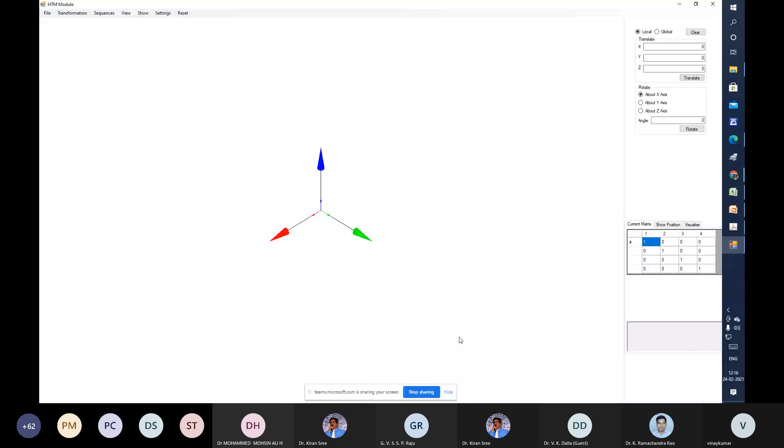in the screen, two coordinate systems are displayed and both are coinciding with each other. Okay, the bigger one and the smaller one. And what are the axes? This red color denotes the x-axis, this green Y and blue Z axis. Okay, and if you click the file, you can open new or you can access some file, okay, and this is the transformation and sequences, okay, also you can sequence your motions.

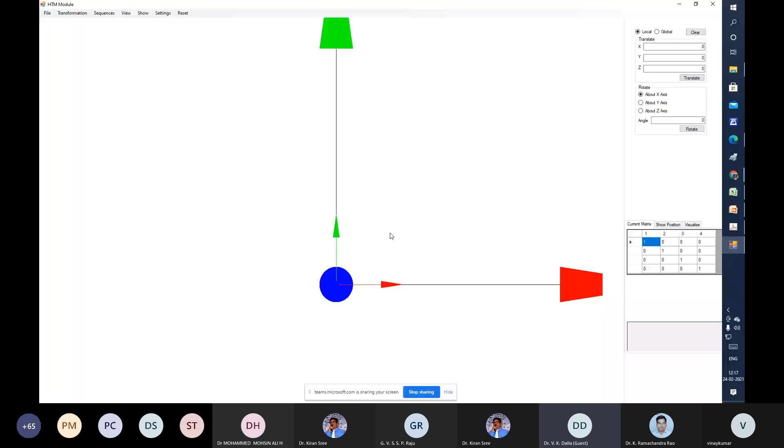What about this, oh sorry, the visualization, so obviously it is the isometric view, okay. Also we can visualize the coordinate systems in XY, like this one, okay, XY or XZ or YZ. In this way we can visualize, okay. And I'm going to click the isometric view. By default it displays this, okay.

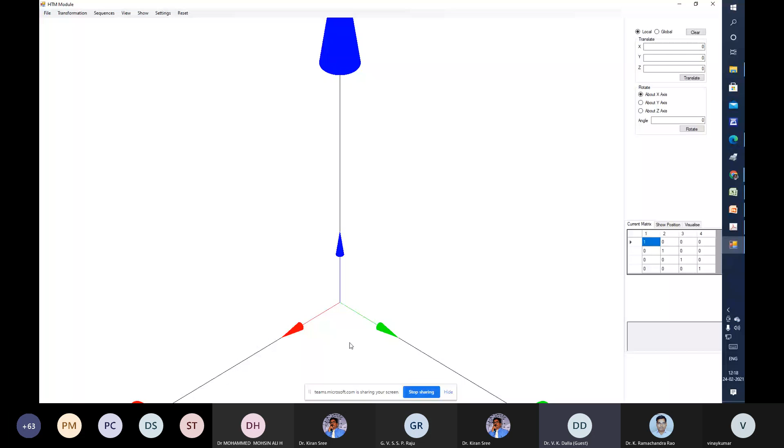Now the right side, if you see the local and global, okay. Local means, if you see the smaller one, suppose it is the absolute frame, yeah, absolute coordinate system, which is also known as the fixed coordinate system, okay. And the bigger one, if we measure this bigger coordinate system with respect to the absolute frame, okay, then it will be known as the local coordinate system.

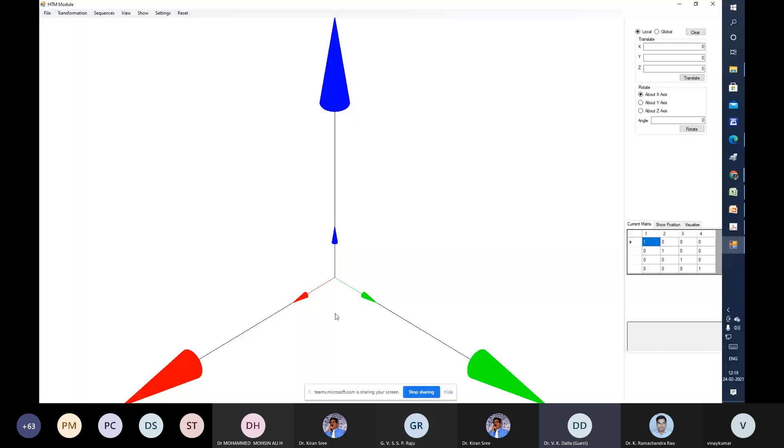Okay. And suppose somewhere in the workspace, if you see my cursor movement, okay, suppose any frame or coordinate system is here, which is the absolute coordinate system, and we are going to measure the coordinate system of the body, whether stationary or mobile. So if we measure with respect to that coordinate system, then it will be known as the global coordinate system. Okay. So here we are going to visualize motions. Okay. So in transformations we see the motion along the axis and motion about the axis.

So if there is translation along the axis, that will be known as pure translation. And if there is rotation about the axis without translation, it will be known as pure rotation transformation. If there is both translation plus rotation, it will be known as combined transformations.

So transformation means, suppose any moving object near us. What are the sequences for the motions? Suppose a robot got moved from one place to another, and that movement is only translation along the axis. And after that it got rotated, taking a turn by some angle. These are known as the transformations.

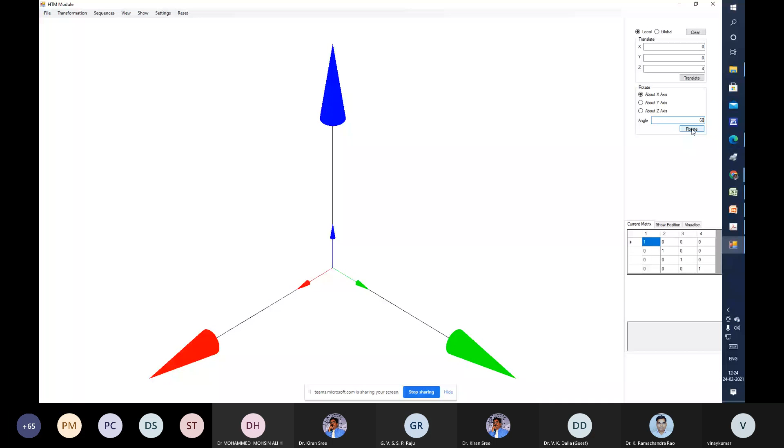So now I'm going to rotate about the x-axis, with an angle of 60 degrees. Now I'm going to rotate it. See. So what are the observations? If there is rotation about its own axis, there will be no movement in that axis, but the other axes, y and z, got rotated. Another observation is they are rotated by the same angle: y rotated by 60 degrees and the z axis rotated by 60 degrees.

And suppose we want this about y, and this about z. And suppose we want again about the x-axis; the red color denotes the x-axis. So you can observe the rotations. So these are the sequences of the operations.

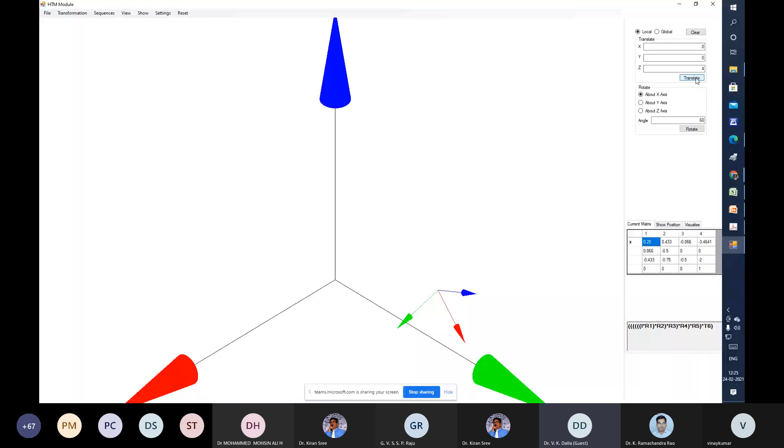Similarly, suppose we want to translate along the z-axis, and the y-axis. In this way we can visualize. And if you see the matrix below, the current matrix, show position, visualize. It denotes the name itself: HTM, homogeneous transformation matrix.

Matrix you all know, but to get the solution, meaning the exact position and orientation of the robot end effector, we need to multiply the matrices of each transformation. Getting my point? Each transformation will give one matrix, so for all transformations we need to multiply the matrices. Then we can know the exact location of the end effector.

Whenever we talk about a robot, we are talking about the robot end effector. And what is the robot end effector? By name you can know: cause and effect. What are the causes? Due to input torques or forces, the robot manipulator will move, and ultimately its effect can be visualized at the end of the robot. That's why the name is end effector.

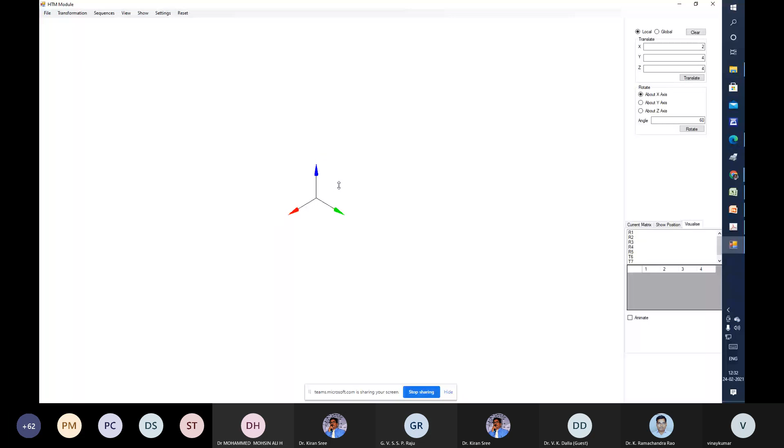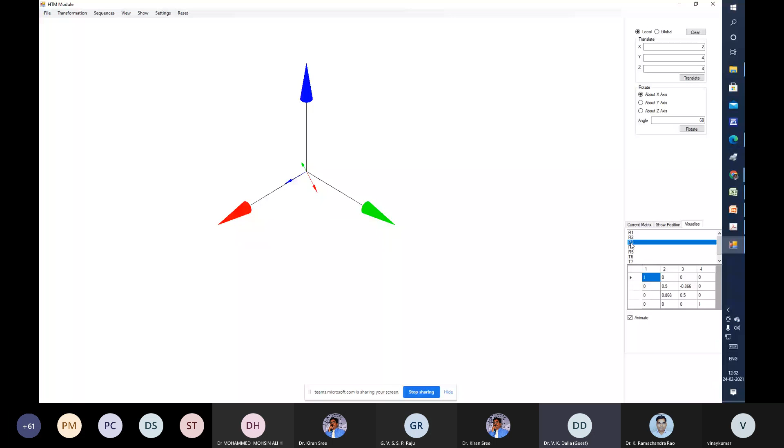See, these are the sequences of the transformations, and in the animation we can see what is happening, like 2, 3, what we did in the third step, and the fourth, 5, 6, 7, and the last one, where T denotes translation. So in this way we can visualize the coordinate systems.

And it is not only limited to robotics. For anything, whether in computer science or electronics, for any object whose location we are going to measure, we need to apply the coordinate system. It is not only limited to robotics.

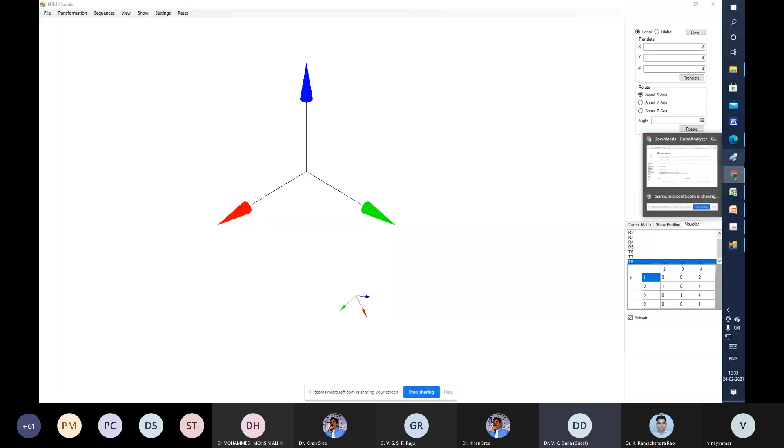Yeah, please let me know if you have any doubts or queries. If you're allowed in the chat box. Okay, I think not allowed. Yeah, no problem. Okay.

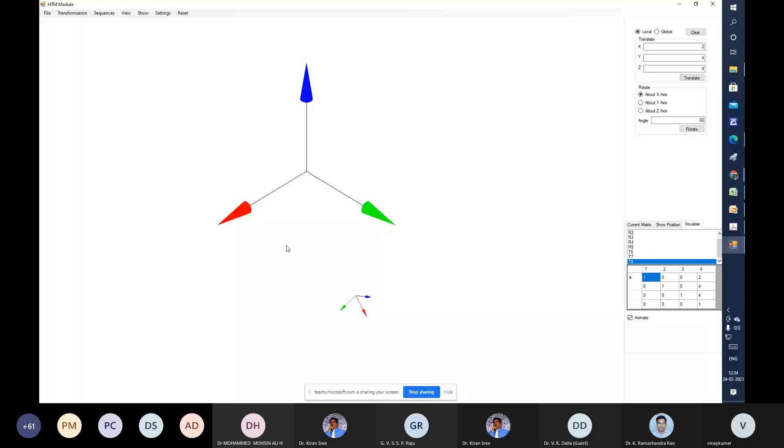So this was about the HTM module, the homogeneous transformation matrix module. Here we visualized the movement of the coordinate systems. We know about the transformations and the types of transformations: pure translation, pure rotation, and rotation plus translation. Also, we know about the local and the global coordinate systems.

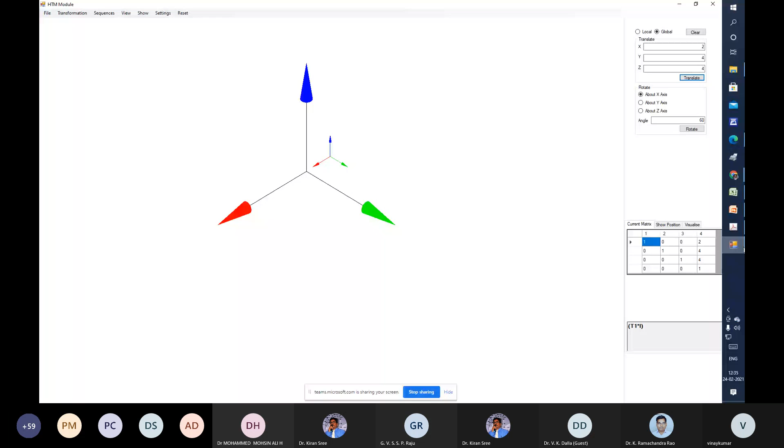Also, we know about the transformation matrix. The transformation matrix denotes both the robot end effector position and its orientation with respect to the base of the robot. Also, we visualized the sequence of the transformations. Now, I am going to open another software, the main software.

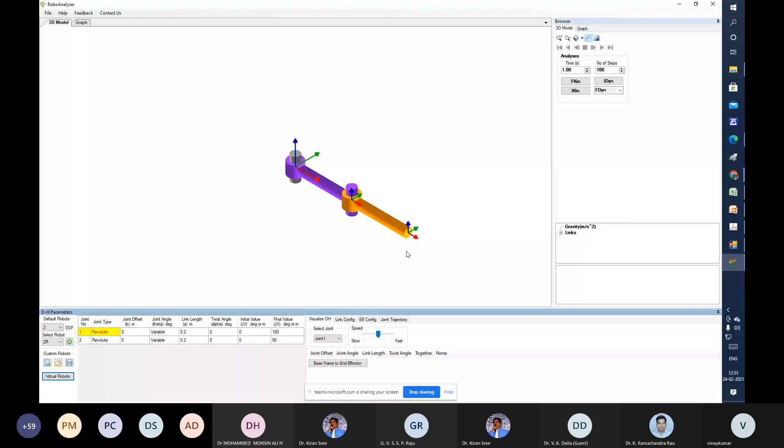So by default, this robot named 2 degree of freedom revolute joints is displaying. So see, this is the 3D model of the robot. Based on the cursor movement, we can zoom in and zoom out. So what about the coordinate systems? See, at all the joints, the coordinate systems are there.

Then only we can locate the end effector. Without fixing the coordinate system, we cannot locate the end effector. We cannot locate the robot. Right? Where is our robot? We cannot locate it. Now, see below the DH parameters. Whether you're from mechanical, CS, or electronics, it is a very general question. So what are these DH parameters? What is this DH convention and why is it required to study?

For a simple robot, you can easily locate the position and the orientation. Like this kind of robot I have shown here, anyone can locate. Suppose you want to know the robot end effector position. So what do you have to do? If this is L1, this will be L2. So what will it be? Now I'm going to open my PPT for this.

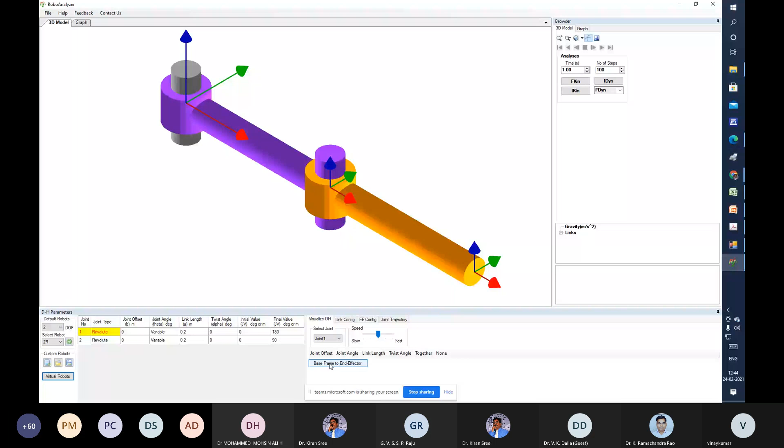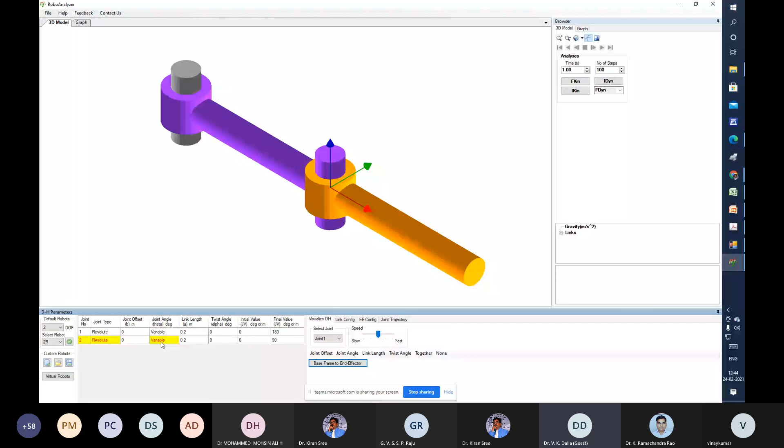And yeah, see the 3D model and simultaneously see the DH parameter table. Again, see, if I click this base frame to end effector, what is happening? Joint number 1, revolute joint, and now it is coming to joint number 2, and the joint offset is 0. Joint angle is variable here, and the link length 0.2. It got translated 0.2. Twist angle is 0.

Okay, now the initial value and the final value. The initial value is what? The position of the robot. The final value is what? The final position. Okay.

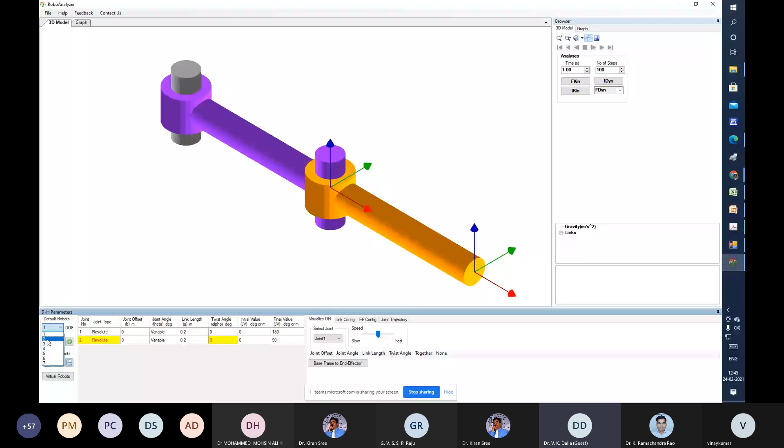So now here there are a number of default robots like 1 degree of freedom robot, 2 degree of freedom robot, 3, 4, 5, 6 degree of freedom robot. Also we can visualize. Okay, this is the 6 degrees of freedom robot. And 4 degrees of freedom robot. And this 2 degree of freedom robot with revolute joints we have visualized.

Okay, what about the prismatic joints? If you select 2P and click load selected robot, it will take updates. See what is happening here. It got updated and the joints are now prismatic joints. Base frame to end effector. Now I'm going to move the coordinate systems. And what's happening? You can see here.

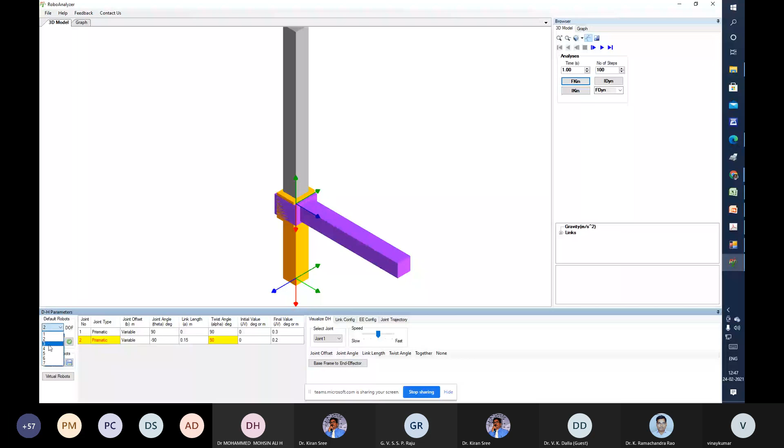Now, the forward kinematics we want. What is the forward kinematics? For better understanding, let's select some more robot and revolute joints.

This one. Now, there are four things: forward kinematics, inverse kinematics, forward dynamics, inverse dynamics. In the case of forward kinematics, what we want to know is the robot end effector location. In inverse kinematics, we just reverse it - now we want to know about the joint variables. So forward kinematics, once again, we want to know about the robot end effector positions.

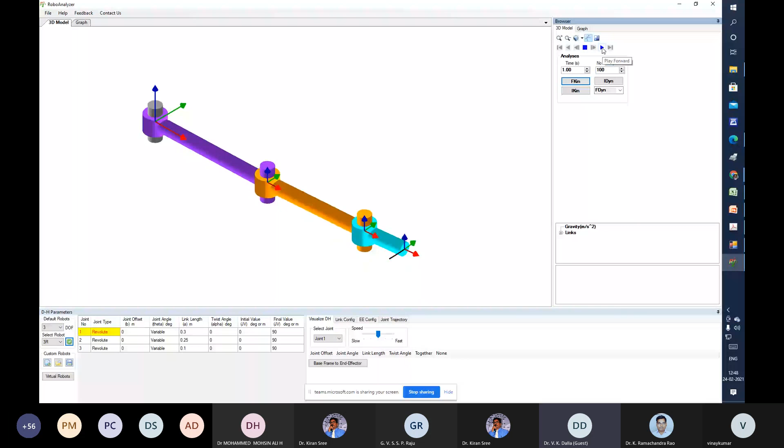Okay, now I'm going to play it. See what's happening. And this traced solid curve is known as the trajectory.

The trajectory is the time varying path equation, it depends upon time. If you read in some books, it clearly defines the difference between the path and the trajectory. The path is the time independent equation of the robot trajectory - it's a time independent equation. But the trajectory is the time varying equation.

Now, the forward kinematics - what we are going to know and what are the inputs. So joint angles, or joint variables, I'm not just saying joint angles because there may also be prismatic joints. So joint variables are the inputs, and what are the outputs? Outputs are here to know about X, Y, Z - these are the outputs.

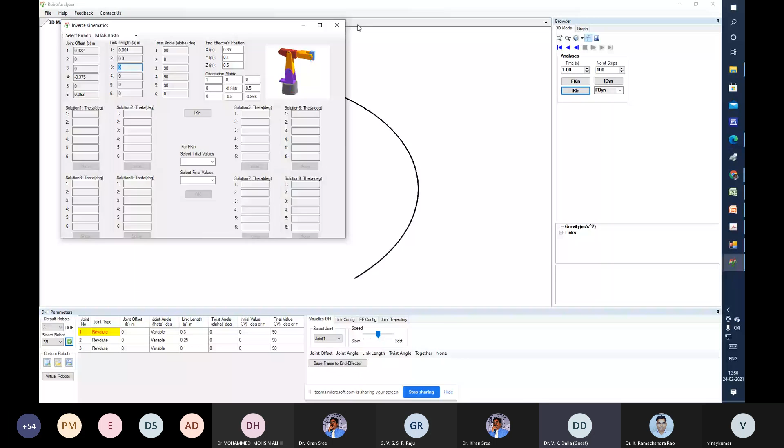Now, inverse kinematics. In inverse kinematics, the outputs will now be inputs. You can see here the end effector's position: X is equal to 0.35 meter, Y 0.1, Z 0.5. So these are fixed now.

And what are the variables, the joint variables that we want to know? For the given end effector's positions, what will be the state of joint angles?

So now I'm going to click the inverse kinematics. Now see the solutions - meaning, to reach the same goal point, what are the alternative options we have? Like so, and that is known as solution 1, solution 2, 3, 4, and so on. 8 solutions are displayed here.

There may be more solutions, but due to this software's constraint, it displays only 8 solutions. Meaning, there are multiple ways to reach the same goal point for the given inputs. And what are the inputs? The joint offsets, link length, twist angle - these are the inputs. And the number of solutions depends upon these inputs.

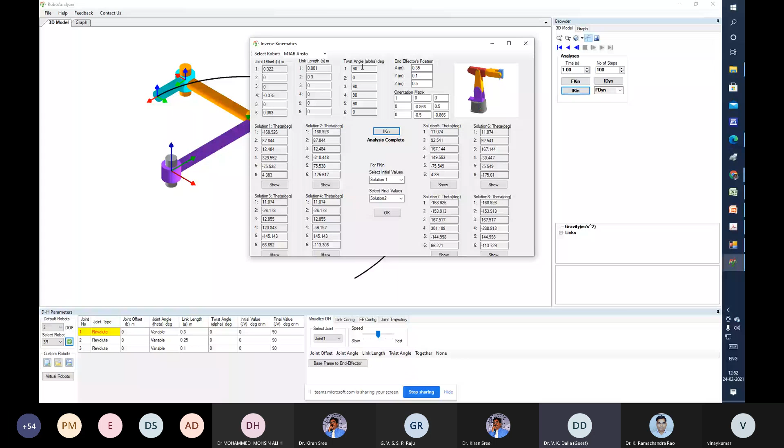So at this stage we know about forward kinematics, then inverse kinematics. Forward kinematics gives only one solution. Inverse kinematics gives multiple solutions, and sometimes a single solution, sometimes no solution. Suppose a robot is going to, say, pick a water bottle.

Suppose a robot is going to pick a water bottle, and that is beyond the reach of the workspace. Wonder what is the workspace? Workspace is the maximum reach of the manipulator.

Then do we have any solution? No, because the object is not inside the workspace. So in inverse kinematics, we get either single solutions, multiple solutions, or even no solutions.

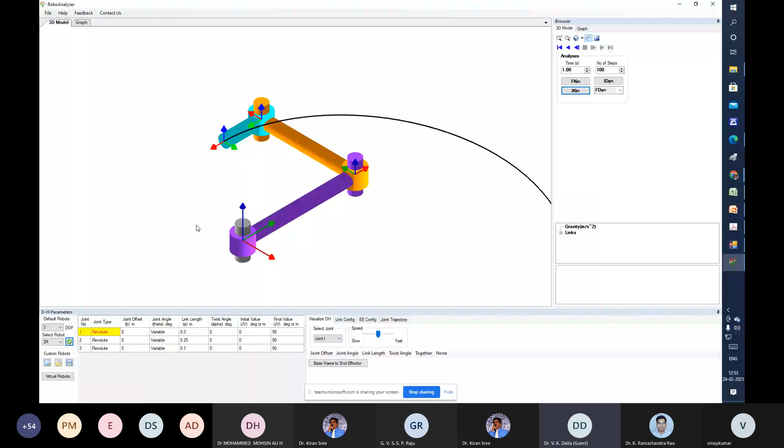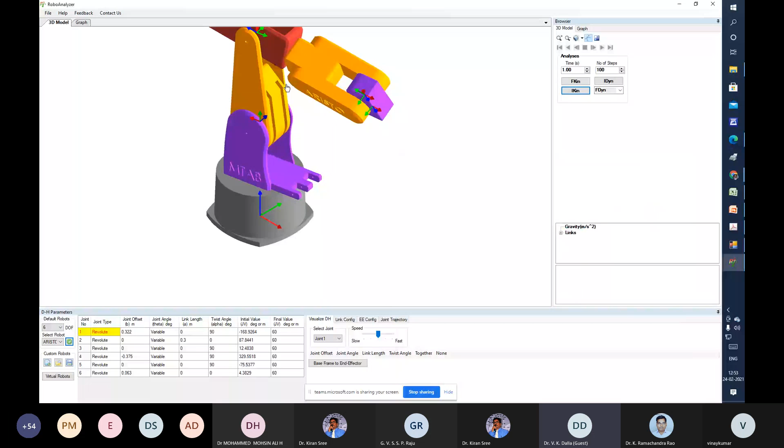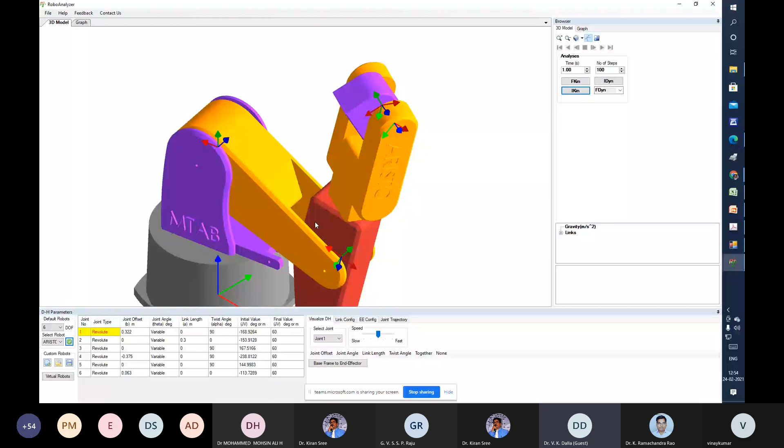Okay, so inverse kinematics, now if you observe, suppose I am going to click solution 1. What is happening? See, solution 1 I have clicked. Okay, so solution suppose 4, solution 5, 8. So what is happening? The robot configurations are being changed, but the end effector positions are at the same point.

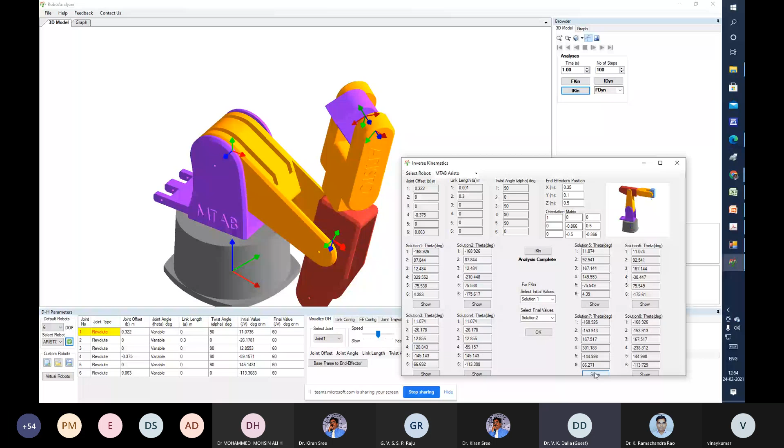You can further visualize - I am going to click solution 1, solution 2, solution 3, solution 4, solution 7, and so on.

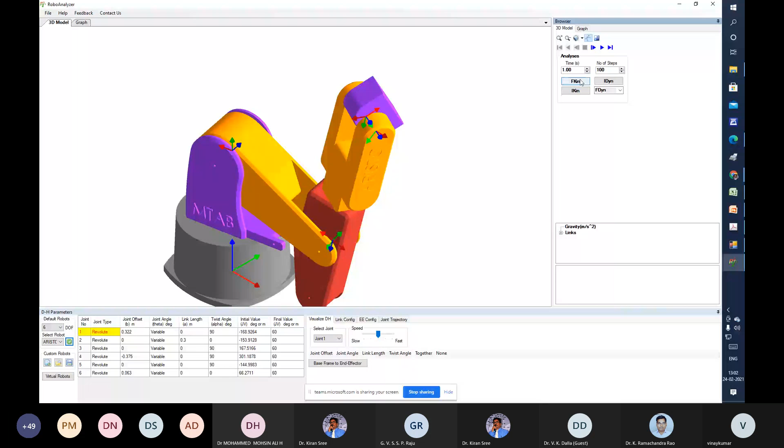See the motion, and I'm going to click graph. Data doesn't exist. What about the other things? In this way, we can get the robot end effector positions.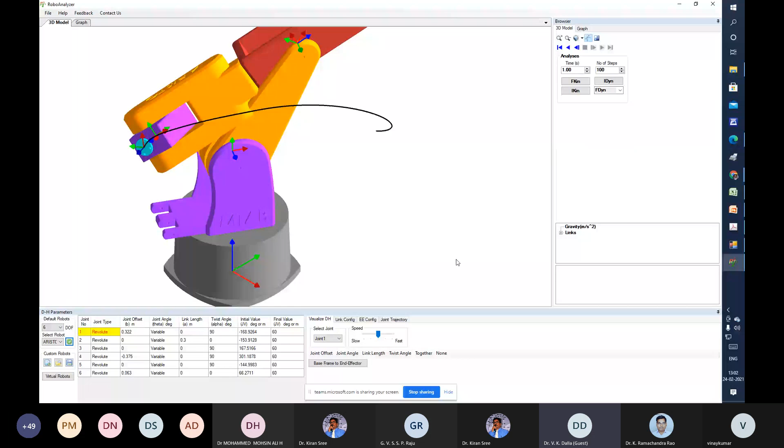Now, suppose we want this for this kind of robot. So this I am doing. Oh, what is happening?

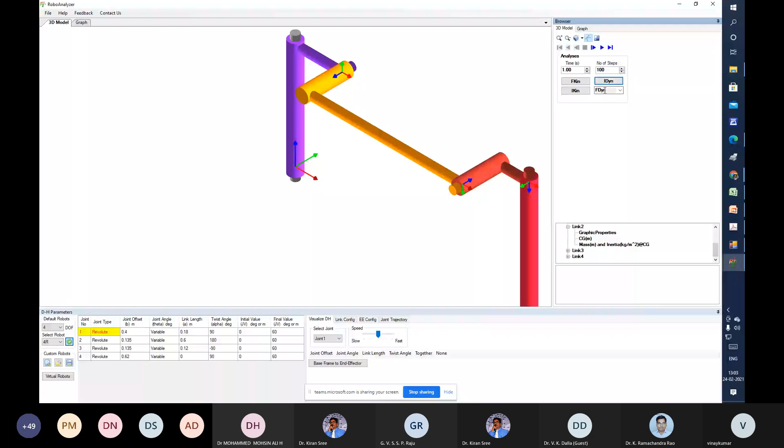No dynamics now. In this way we can visualize the forces and torques with the help of graphs. The robot motion we're seeing will be the same whether we include the dynamic portions or not. In this way we can visualize the kinematics and dynamics of a robot. Now I'm coming to the PPT part.

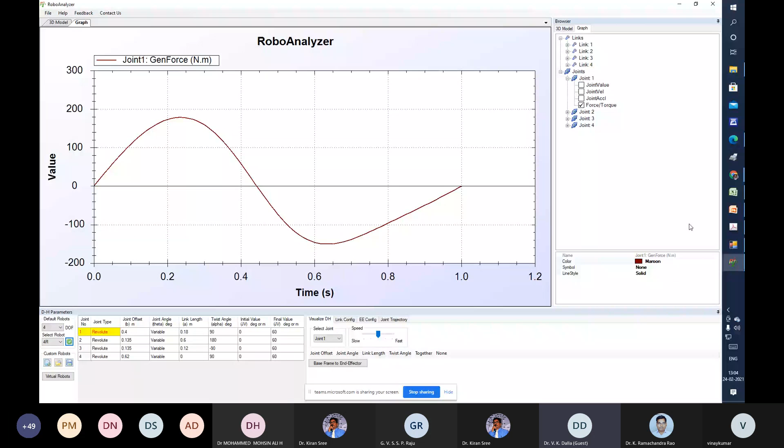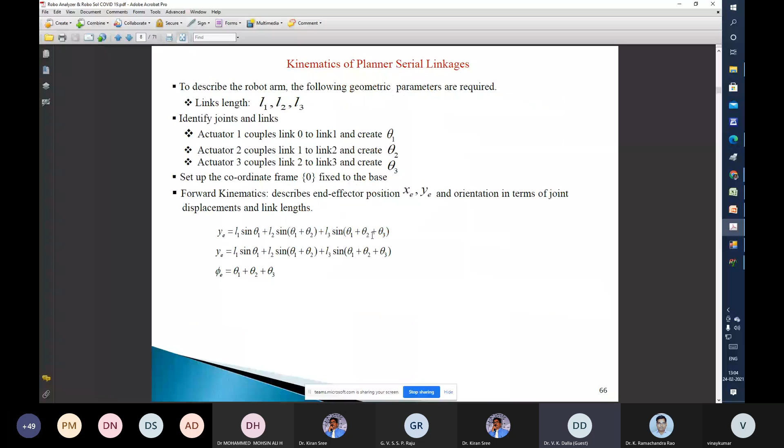So there were some assumptions, kinematic chains, then forward kinematics and inverse kinematics. This we came to know about, and how to know the positions and orientation of this kind of simple robot. And inverse kinematics - what are the problems with inverse kinematics?

Sometimes the problem is we don't get any solution. But what are the plus things? We get multiple solutions. These are some assumptions, and the multiple solutions again - to reach the same goal point there are two configurations: elbow up and elbow down. So in this way we can reach the same goal point by two ways.

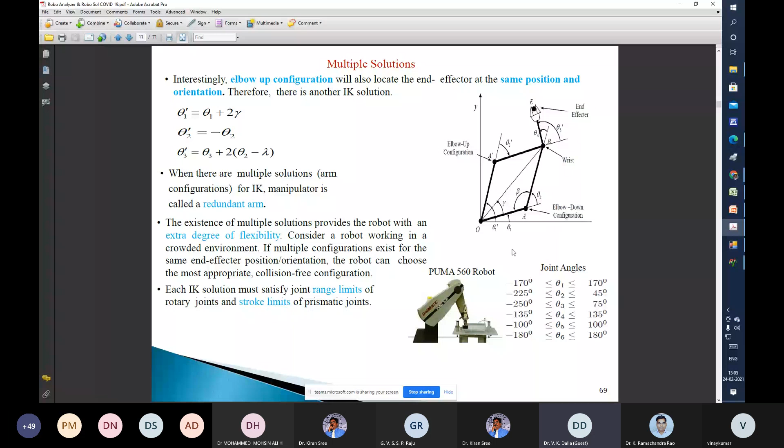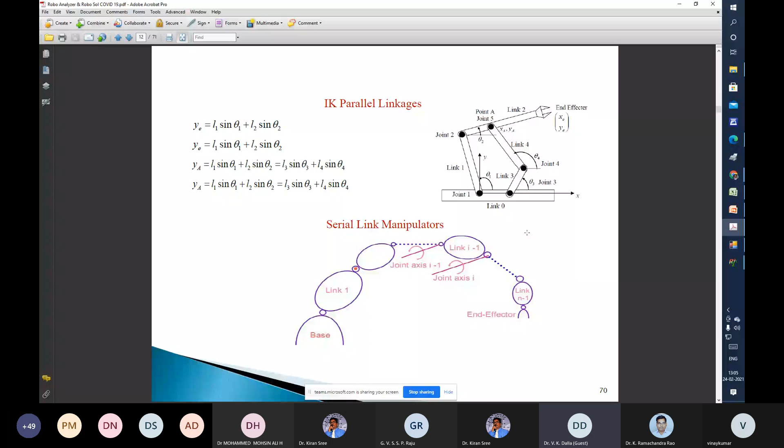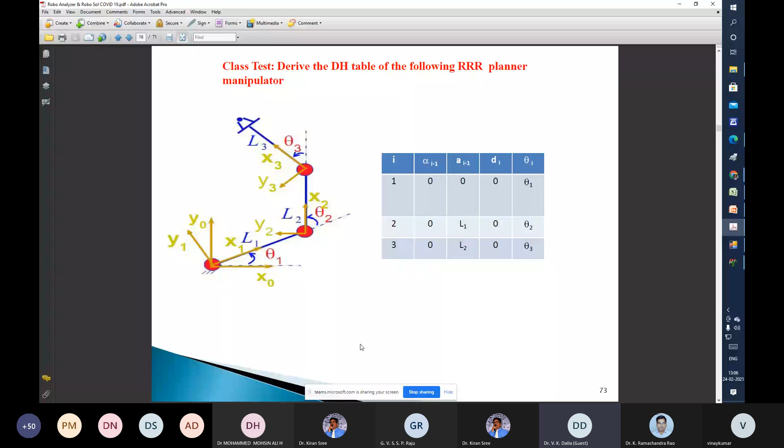Same here, using these parallel linkages also we can understand. Regarding DH conventions - these are the DH convention, DH parameters, and with the help of DH convention how we can get to know about the parameters. For the simple robot also we can go with DH parameters, but that's not advisable - for the simple robot you opt only for geometric analysis, simply we can get it. So regarding this RoboAnalyzer...

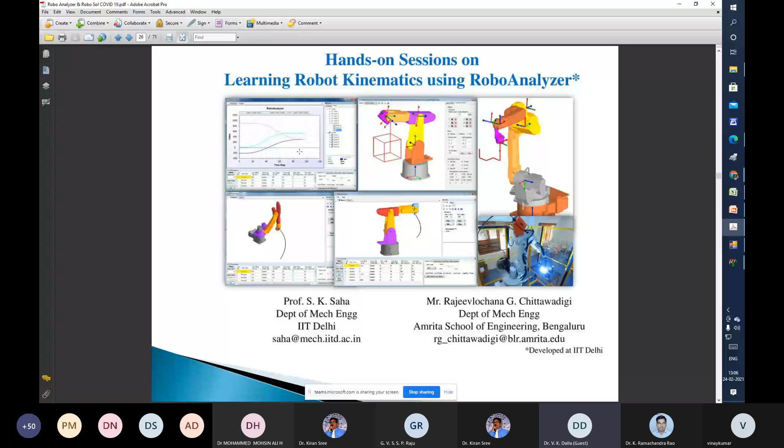So what we came to know about is homogeneous transformations, DH parameters, forward and inverse kinematics, and motion planning. It is very useful for robotics education - theory plus, if suppose we don't have any actual robot, we can visualize, and for practical purposes we can model the CAD and simulate real robots, like we have a feeling like real robots.

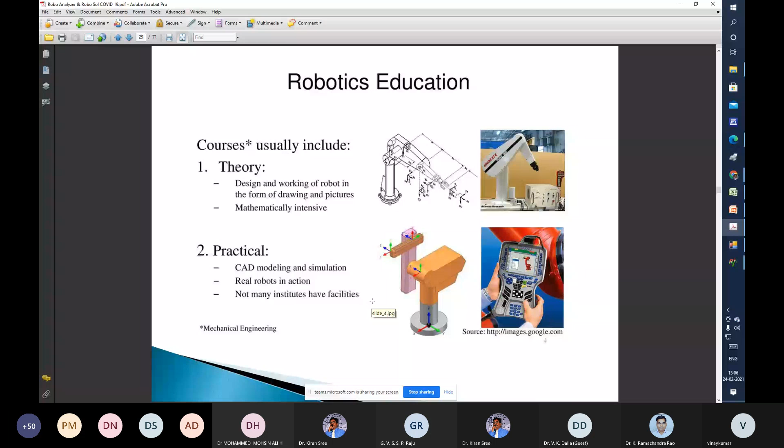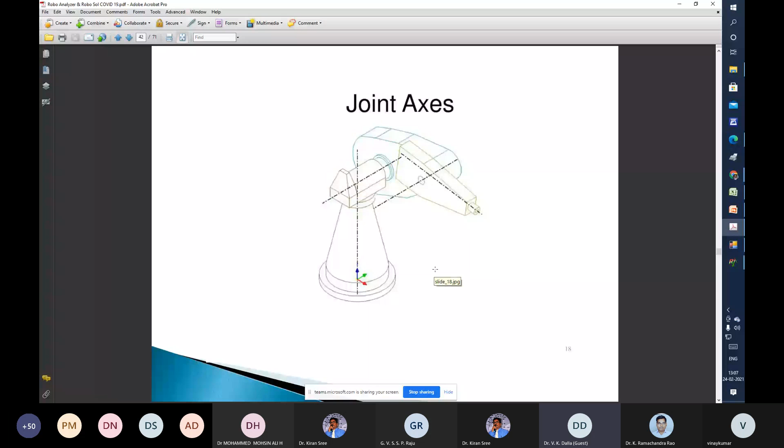These are some things which I have already covered - the RoboAnalyzer software and transformations.

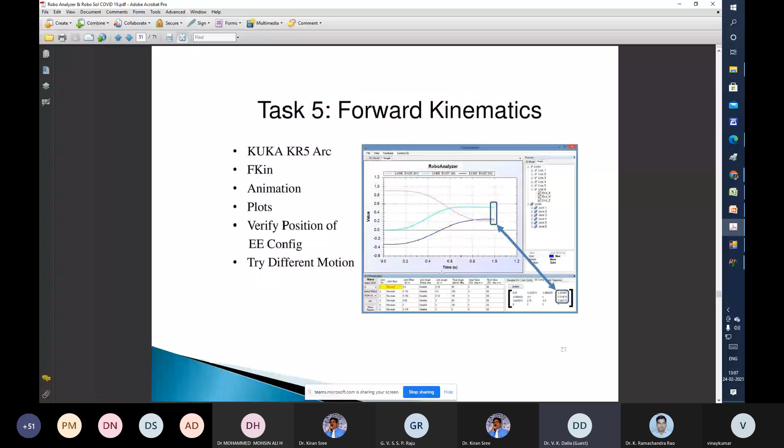Now I'm coming to robotics and AI solutions to COVID-19. My request is not to see this as a complete solution, but just alternatives to break the spread or outbreak of COVID-19. Companies all around the world are exploring ways to use robots to increase and maintain social distancing. Robots are performing jobs that workers are unable to do from home - it is very obvious.

The biggest retailer in America, Walmart, is employing robots to clean its surfaces. In South Korea, robots have been used to take temperature measurements, and the machines are being used by restaurants and grocery stores. In this way, robots are being used with the help of artificial intelligence.

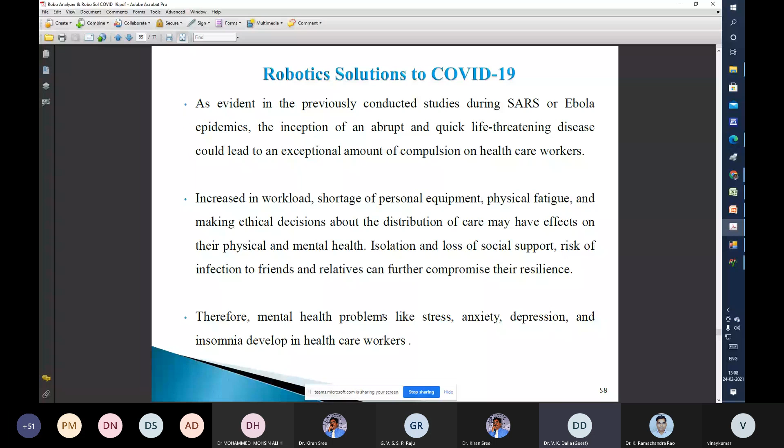From internet sources I came to know there are 10 ways robots fight against the COVID-19 pandemic. The novel coronavirus crisis has increased public interest in robotic technologies and artificial intelligence, seen as effective resources in combating the pandemic. Let us check some examples of how robots are addressing the challenges posed by COVID-19.

In Europe, inside hospitals, robots can be deployed for disinfection, medicine and food delivery, and monitoring vital signs, thus helping to significantly reduce the infection risk of all personnel. What are the ways to fight against COVID-19?

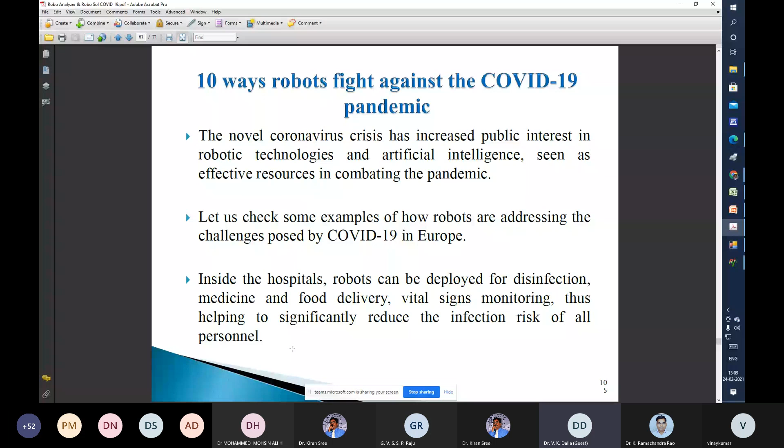It can disinfect hospitals, deliver medicines, do blood tests, deliver food, and help with hospital logistics in general. Robots help keep doctors safe from coronavirus, help speed up coronavirus tests, and help patients and the elderly maintain social contact. In Spain, ABB robots have been reprogrammed by Nagami Design to produce...

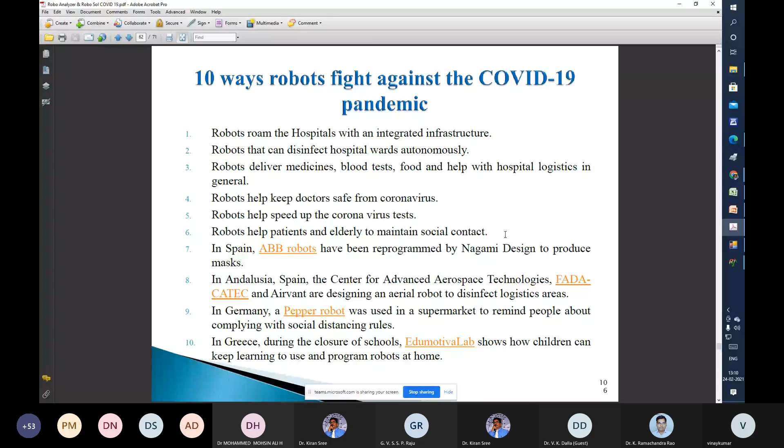Sorry for the disturbance.

So what about made-in-India robots and how these robots are helping health workers fight COVID-19? See Astra, Mitra, and Robodog by Invento Robotics - Bangalore-based Invento Robotics, founded by Balaji Viswanathan.

Can you share the PPT, sir? Yeah, yeah, yeah.

Now we are going to talk about made-in-India robots. So, Astra, Mitra, Robodog by Invento Robotics, Bangalore-based, founded by Balaji and his group. It is a full-stack robotics startup that helps automate customer engagement in banks, airports, restaurants and other places. The startup has now turned its business focus to help fight the coronavirus pandemic.

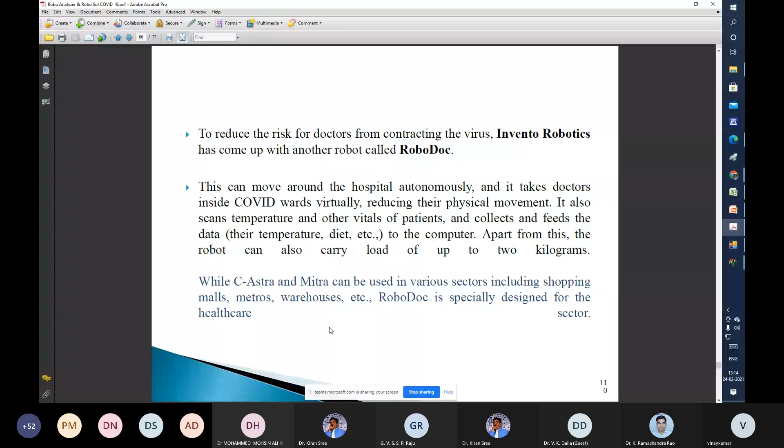There are also some startup companies, like Milagrow HumanTech, founded by Rajeev Karwal. In 2007... recently he launched 4 new humanoid robots. Humanoid robots means it looks like human, and these are the names of the robots: Robo DiCaprio, Robo Julia, Robo Namo, Robo L.

It is specially designed to cater to hotels, hospitals, restaurants, and corporate offices. These humanoids can interact with the customers, as we are all aware nowadays. You might be knowing about Sophia robot. Sophia is a humanoid robot that can interact, can answer, can reply, can show emotions, even anger.

And also Asimov Robotics, based at Kochi. Asimov Robotics, under the Kerala Startup Mission, developed 2 humanoid robots in March this year. These robots were the first in the country to raise awareness about the spread of coronavirus among people in Kerala. The robots currently distribute masks, sanitizers, and napkins in the startup.

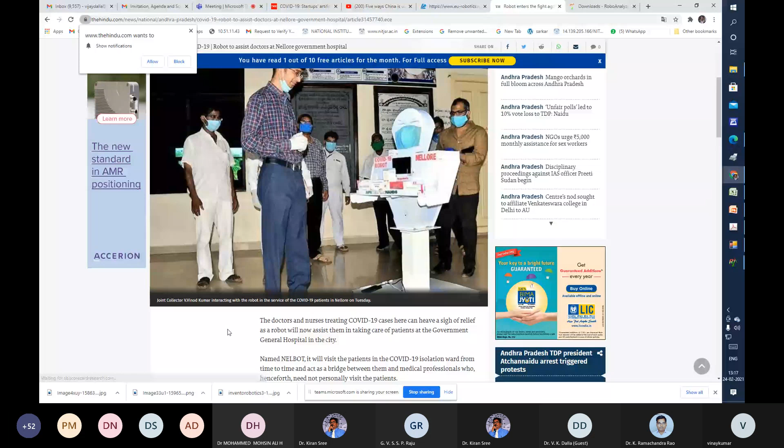So you can see the COVID-19 robot to assist doctors at Nellore Government Hospital, being used in Nellore. And what about the robot to help COVID-19 patients in Andhra Pradesh, Vijayawada? Also, the Sophia robot was invited to a tech festival in Vijayawada.

See the named robot, Made Robo - the device has been put into service. The Visakhapatnam based Waltair Division of East Coast Railway has developed a fabricated robot to assist hospital staff in serving COVID-19 patients. Named Made Robo, the device has been put into service from Tuesday, based on this news.

So there are many applications of robots in the field of COVID-19 in Andhra Pradesh. That's why I searched for developments there, since the institute is located in Andhra Pradesh. There are many developments, like the Matri robot in Vijayawada, to serve COVID-19 patients. You can see the robot with the concerned persons.

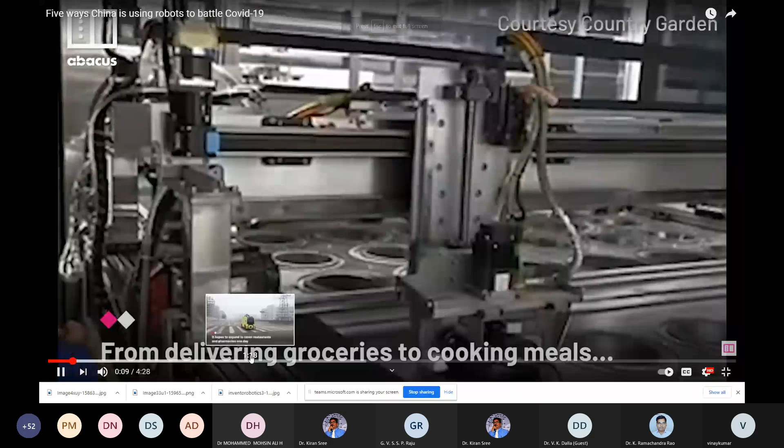And why not see some examples? I'm going to play this. These are the robots, recent developments to fight with COVID-19.

We need to skip this, it's just taking time.

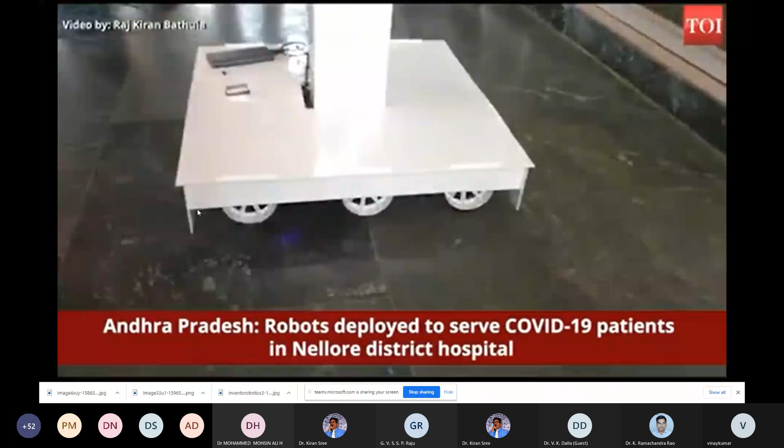So there are many examples. Now, almost I have completed. I'm going to share.